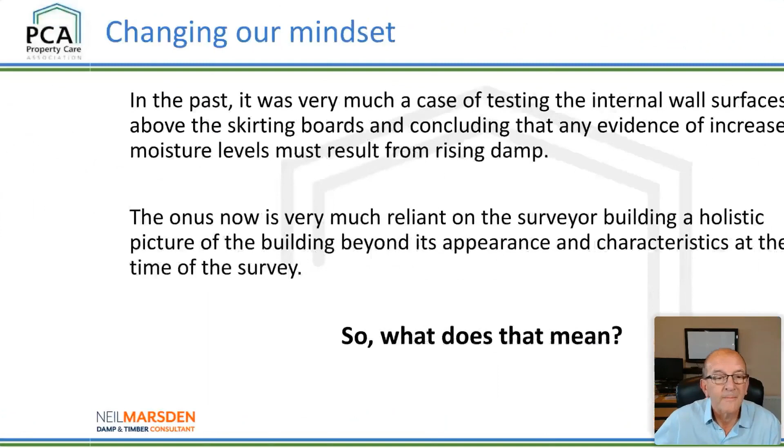So we've got to change our mindset. It's very much a case of, in the past — and I think anybody who's been in the business as long as I have, or for a considerable period of time, will pretty much agree with me — and to some extent it's still out there, not among the better companies, but there are companies out there that...

...get their hands on the mystical moisture meter. Somebody thinks they may have a damp problem, or maybe it's a pre-purchase situation. They go out with the damp meter, skirt around the base of the walls above the skirting boards, and see any evidence of red lights, flashing, or bells ringing on the moisture meter. And the conclusion is then that you must have rising damp. This is typical, I see it again and again.

I'm fortunate because I see a lot of survey reports. The majority of my work is pre-purchase, so somebody's buying a property and they've had a survey carried out. Then in the survey it states: evidence of elevated moisture levels were recorded up to a height of 400 millimeters on the front main elevation, which strongly indicates that the wall is suffering from rising damp. We now recommend you seek further investigation by a damp specialist.

Rising damp always seems to get a mention, but I'm sure it's well established. Does it exist? Of course it does. Is it as common as we believe? Probably not. So we've got to be careful.

There's lots of things that will contribute to damp in buildings, and it's up to us as professionals to sift through that and reach an educated, informed conclusion from which we can then advise the clients on how they proceed. So the onus is now very much reliant on this guidance out there, which says that we should be carrying out the survey in a holistic manner.

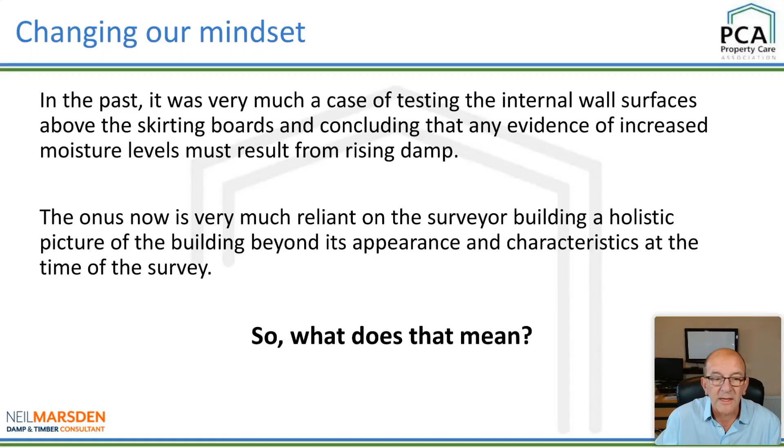Before we even do the survey, we need to establish some factors or details about the property. The age of the property is important because there are different methods of construction — things were added to the construction regulations as properties were built. So it's very important we understand the age of the property, to get a feel for what type of construction we're looking at, and potentially what we can't see, what may be under there.

The type of construction materials and techniques — is it bricks, stone, solid walls, cavity walls? They play a huge part in what we're looking at. It's also about how the building sits in its environment. Is it an exposed location?

What is the orientation? If we're looking at mold problems on a wall, we check it on our compass. A lot of the time, especially where I am, it's going to be the north and east facing elevations. I always teach this from the very beginning whenever I'm working with anybody — I say the one thing you need is to understand orientation. Where does the sun come up in the morning? It comes up in the east.

By midday it's in the south. And then obviously it sets — when we're sitting on that cliff edge with our loved one, with a bit of Barry Manilow on, having a little bit of sway, we're looking west.

Now, that might seem very simple. Again, I was with a group earlier in the week, and I asked a question about orientation, and they really didn't understand it. But once you establish it, we're trying to use all diagnostic information possible to allow us to carry out accurate diagnosis. Orientation is certainly one of the things which is beneficial.

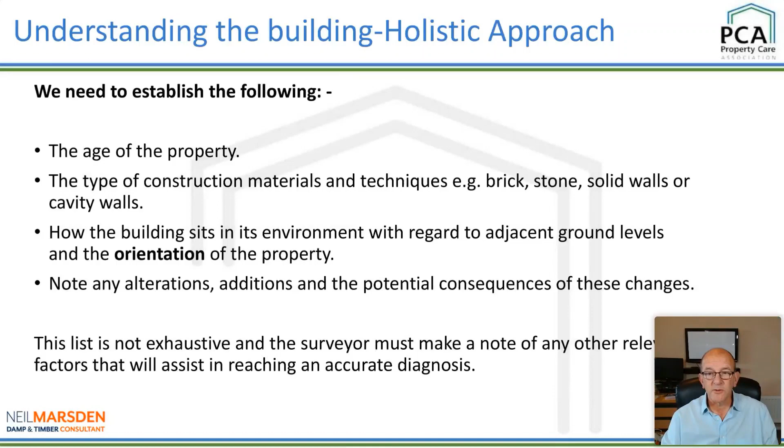So diagnostic tools, what do we use? I would assume that most surveyors or most people who deal in damp investigations on a regular basis will have a range of diagnostic tools. The electronic moisture meter is something which creates great debate. I'm always amazed when I see the social media platforms and you mention the damp meter, and some people feel faint, and you've got to scrape them off the floor - how dare anybody own a damp meter? I realistically think it very much depends on the field that you work in.

I can understand that - well, I've taken myself as an example. A lot of my work is pre-purchase, so I do a pre-purchase survey. The restrictions imposed on that pre-purchase survey are the fact that it's going to be non-invasive. It's normally established before you get to the property. So I turn up, and I can't demand that I remove plaster samples, scrape bits of wallpaper off for diagnostics, and whatever it is that I think is necessary to get a 100% accurate diagnosis. So at the end of the day, to some degree we're going to have to utilize what we've got and make the best of it.

So I never decry anybody for using an electronic moisture meter. But ultimately, I think if you're going to use a meter on a regular basis, or use it in damp diagnostics, you need to use it effectively and understand how it works. A lot of people don't really understand how the electronic moisture meter works, and that is the big downfall. They start putting figures on diagnostics which are not relevant.

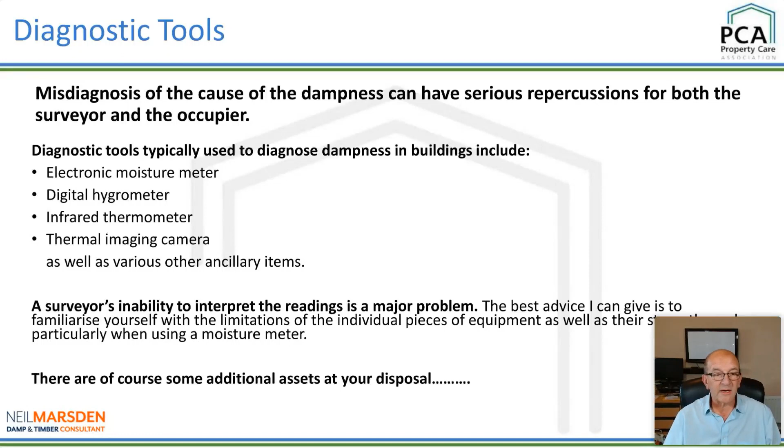So we have our basic toolkit, and obviously we'll have other ancillary items in our toolkit. So what else do we have available to us? We have two of the best bits of kit we could possibly have, and they came free of charge - the items I'm referring to, your greatest assets while carrying out a survey, are your eyes and your mind.

Too much reliance on your technology and a lack of thought can have serious repercussions, both financially and emotionally. Why do I say emotionally? Because I've been involved in cases where people have been accused of giving inaccurate diagnosis or inaccurate advice, and normally there's a price to pay financially.

That is a small part of it. I always think the bigger damage - we can accept it if there's a financial penalty, somehow we get past that - but it's the emotional damage you'll suffer having to defend that case and get through the whole process. So at all costs, you try to avoid it.

But we were given a pair of eyes and a brain, and your eyes and your brain are phenomenal tools - look at what mankind has achieved with them. So when we use our diagnostic tools, I had a very interesting one - a surveyor came up and spent a day with me a few weeks ago.

It was just under a day because he had to get away early. He turned up with his damp meter, fine, lovely guy, we got on really well. He came up for a few hours and we went out on a survey together.

He put his meter on the wall, and the red lights were flashing, hitting maximum. He said, 'Oh, the wall's damp.' I said, 'Seriously, do you think so?' He said, 'Yeah, we can see the meter, it's really damp.' I asked what he'd recommend. He said, 'I suspect it's rising damp.' I asked why, and he said, 'It's just the way the meter is reading, it's telling me this.'

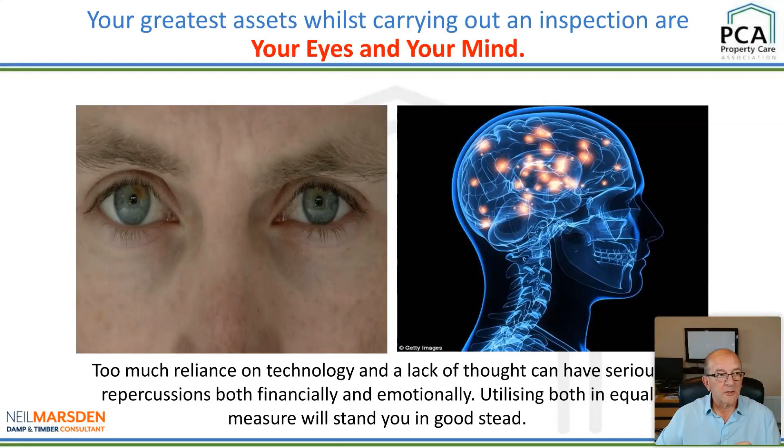So I thought I'd walk you through a short case study, a property I looked at probably about four weeks ago. We often talk about following the trail: rather than just relying on the equipment, we try to gather as much information as possible from the environment we're in, and then follow what's happening. We talk about it, but how do we actually do it? This case is an example of where it can be very beneficial.

Obviously they were concerned, they'd seen the news and heard all about this dreaded mold that's going around. So the daughter decided they needed to bring somebody in to give some advice. They looked up the local search and identified a damp specialist who they believed was probably a good fit for them.

So they invite the damp specialist to come to the property. The damp specialist came out and said, when you see mold like that, it's very typical of condensation. The summary was, it's very typical in properties of this age and type of construction.

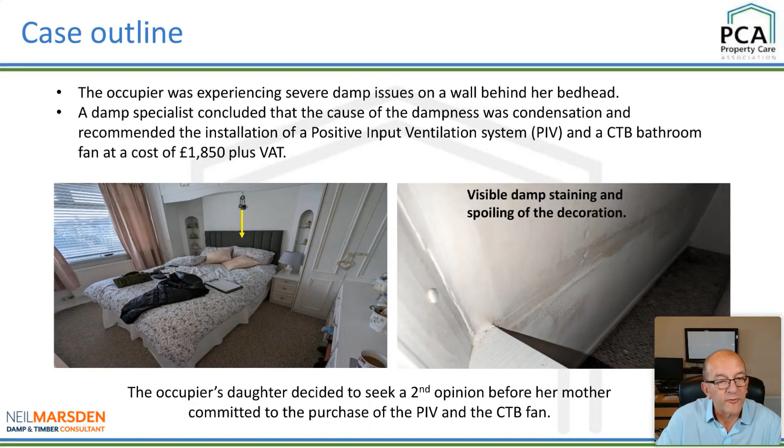So I got there, had a big chat with him. How long have you lived in the property? I've been here a lot of years. Have you ever had a problem before? No. It's condensation - have you had condensation? Do you see it on the windows? I always think speak with the client or the property occupier, they will give you a mine of information which is going to allow you to build a picture.

So it was obvious that condensation was an issue. The mold and mildew on the back of the bed head and everything else pretty much pointed in that direction. So I said, are you happy for me just to potter on and wander around the property and really get a feel for what's going on? Yeah, absolutely. So anyway, they left me to it.

The one thing which, on the photograph, looks fairly obvious, but when you walk into the room, it wasn't something that jumped out at you - I've zoomed in there so it magnifies it. But I noticed that the Contiboard at the base of the built-in wardrobe was slightly swollen, as you can see. Straight away that raises a little bit of a red flag. Why? Sometimes they do split and it might have been an installation fault or whatever.

So what I decided to do then - the bed was pulled partially out - I got a damp meter and decided to scan the carpet in that area. Sounds a bit bizarre, but by doing so it actually indicated to me that there was a significant moisture content in the carpet. As a result of that, I'd already asked them, can I roll back the carpet, are you okay with that? I'm a decent carpet fitter, I've been doing it for the best part of 40 years, and they were happy for me to do so. They wanted to get to the bottom of the problem.

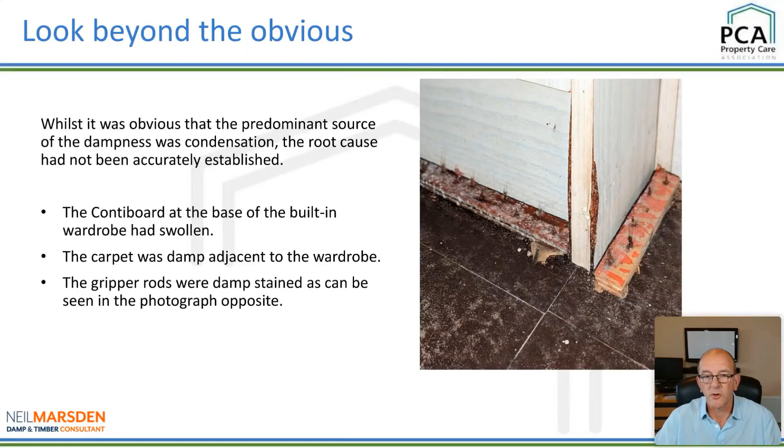The solid floor is overlaid with thermoplastic tiles, but there you are - I put the moisture meter, managed to insert it between the tiles, and at the location adjacent to that swollen Contiboard, I'm getting readings of around 28-30% moisture content. It's obviously more than I would have expected. And then 1.5 meters back from the gable elevation, which has got the condensation behind the bed head, I'm getting readings of around 11%.

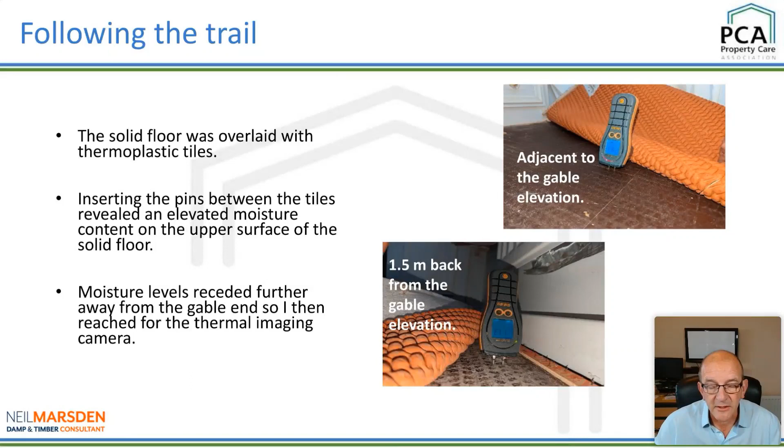There was a significant tail off as I moved away from that built-in wardrobe. That raises concerns, or points to the problem being somewhere in the region of that built-in wardrobe. So I decided to get the thermal imaging camera out.

While I was doing that, the relative humidity within the bedroom was just under 70%. Now, that's a snapshot, a moment in time. It doesn't really tell me anything substantial or significant.

But I did go into the other rooms. I placed the hygrometer into the different rooms adjacent to that area, and the average relative humidity in the other rooms within the property was 56%. So it tells me that there's something in particular going on - why is the moisture content, or relative humidity, hitting 70% specifically in that bedroom?

Again, is it on its own? Does it give me anything meaningful? Probably not. But as an additional piece of evidence, it's a benefit - it gives me something I can work with to build up a bigger picture.

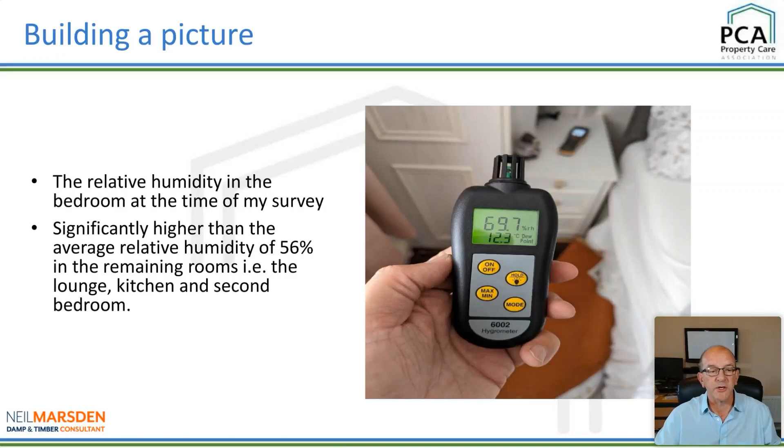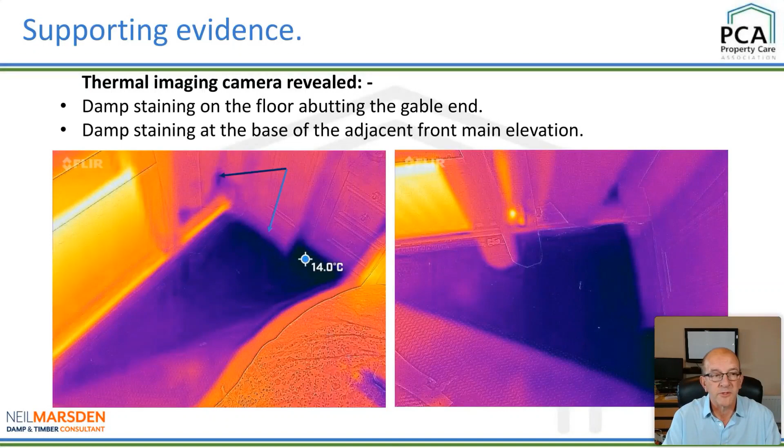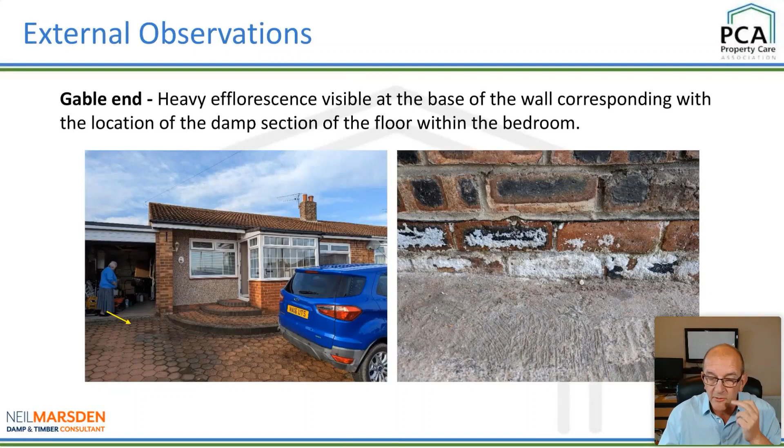Had I not gone outside and seen it, I would never have known about it, but it was very beneficial to see this. It corresponds exactly with the area where I suspect there's an internal plumbing leak.

So considering all of the evidence at the time of this survey, my conclusion was that condensation was the result of an internal plumbing leak. The recommendation was that the client instructs a heating engineer to investigate and locate the source of the plumbing leak.

Now, this is perfectly reasonable. We are surveyors - we go out and do surveys. We are not experts in every aspect of building construction. In the past, we seem to have got into a scenario where we wanted an instant solution, where we wanted to give the client an instant solution. But sometimes we can't do that - it sometimes requires further investigation by a specialist in that field.

So anyway, long story short, the client's daughter called me 6 days after I'd carried out the survey to inform me that a leak was found on a pipe located below the base of the built-in wardrobe. The repair was completed - it was identified, and the heating engineer carried out the repair at a cost of £165, inclusive of VAT.

So following the trail, just by gathering the evidence at the time of the survey and trying to piece it together and build a picture of what is normal in this property and what isn't, following the trail resulted in an accurate diagnosis, and the homeowner saved themselves over £2,000, minus the cost of a bottle of Singleton whiskey that she asked her daughter to send to me as a thank you, because we'd had a chat.

The lady in the property was Scottish. We got on about whiskey, as you would when you're in somebody's property. We did get on from where she came from. We talked about whiskey, and very kindly she remembered, and she sent me a lovely bottle of whiskey to enjoy.

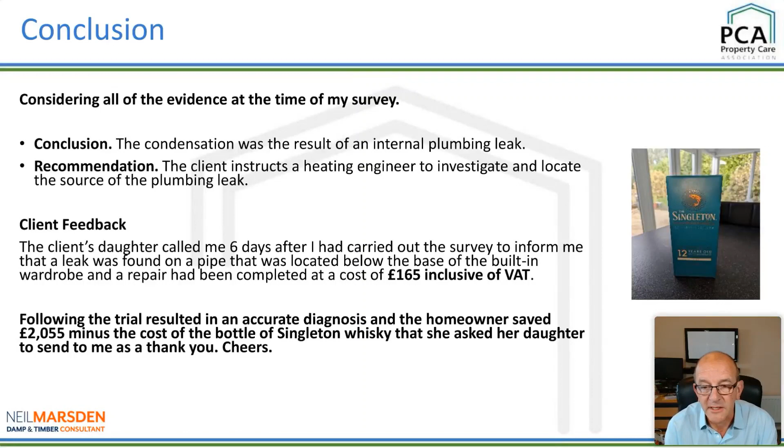But I'm just delighted that she got the right result. It would have been very, very easy to say it's just condensation and install the CTB fans and so on.

So we've seen it before. This, again, is a very quick case study. It's the easiest way to bring it in.

The background of this property: it consists of a block of residential ground floor flats built in 2022. Bear in mind, we're only in 2023 now, so these properties are a year old. Built of cavity blockwork, brickwork, block and beam floor construction, with internal walls dry lined on metal tracking stud framing.

All three of the ground floor flats experienced condensation issues at the base of the wall and the skirting boards, with heavy mold growth visible in isolated areas. The first floor flats were not affected, so it was a problem on the ground floor.

The extractor fans - so it was Adam. Adam is an associate of mine who's based in Colchester. Adam did the survey, and afterwards he told me about it. We talked about it while the process was going on.

Adam turned up, did the survey, and he noted that the extractor fans, the extraction rates were poor, and the undercuts on the door were inadequate. So they were restricting the ventilation and airflow within the flat.

So we see the obvious - we've seen this before. We look at it and we can jump to a conclusion. You need to deal with those undercuts on the doors, and you need to get the extractor fan either serviced or replaced. It would have been very easy to go back to the client and say it's just condensation - we recommend we get the doors undercut, and get the fans serviced or replaced.

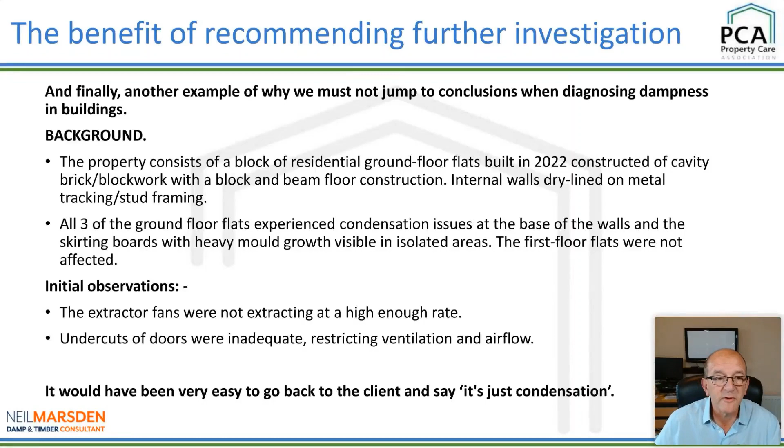There you are - using, so we've tested, Adam's tested the fan, that's his arm, and he's tested the fan. The extraction rates are poor on the mechanical extraction fan. The doors, when they close, are tight to the carpet, so there's no ventilation whatsoever from room to room. So we note these things because it's important when investigating damp that sometimes it may well be that they are purely the cause of the problem.

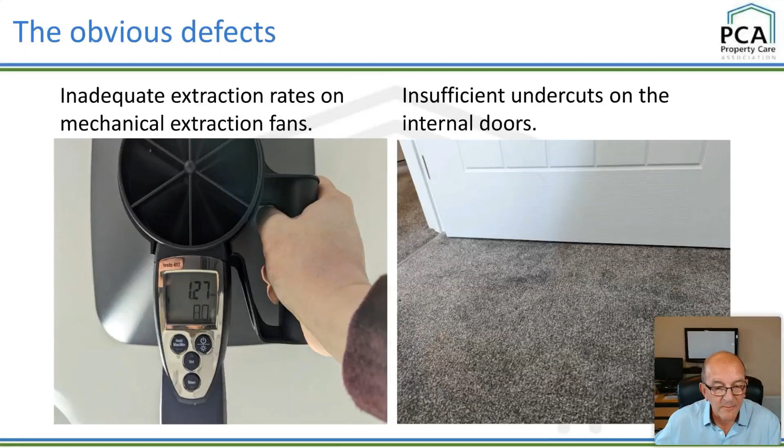But in this instance, Adam suspected there was something else going on. He carried out further investigation using a thermal imaging camera and revealed isolated cold spots in several areas. Because of the cold spots, Adam then decided to carry out an inspection of the cavity using a bore scope, which was perfectly logical.

So we started off with some mold and mildew in the skirting board. We've checked, obviously, the holistic approach - we check all the potential contributing factors in the building, which leads us now to getting our thermal imaging camera out, and you can see these distinct cold spots.

So Adam recommended further investigation. It was outside the scope of his survey, but the initial thoughts were it was probably a problem with cavity wall insulation. So Adam did his bore scope inspection, and lo and behold...

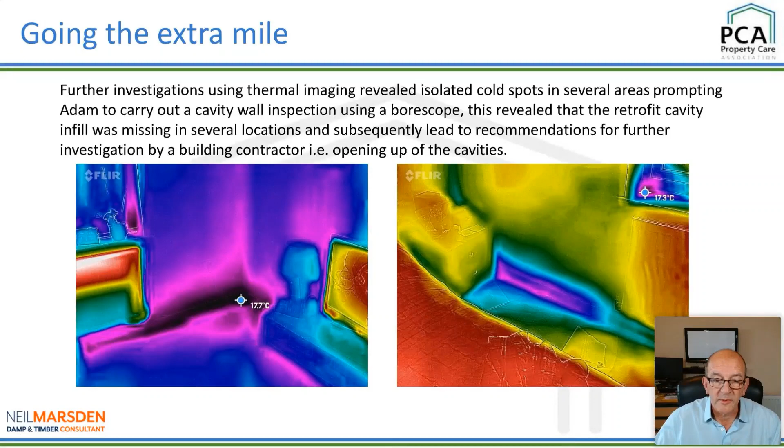That is the condition of the newly installed cavity wall insulation. I'm sure you'll all look at it and straight away agree that it's not brilliant.

So we've got a problem now, and the problem is, Adam can do a bore scope inspection, but we're limited on what we can do. Can we start breaking open walls and all the rest of it? The chances are we probably can't, and we're not equipped to do that.

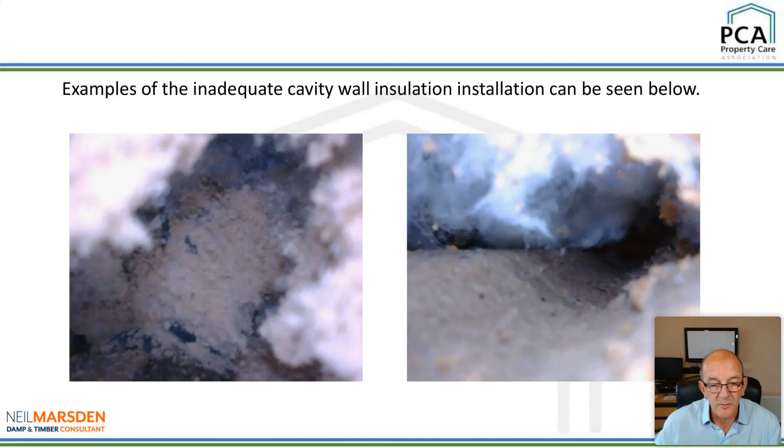But following the investigation, it was fair to recommend further investigation, which Adam did - he went back to the client and said, I believe there's a problem here, and it's almost certainly related to the inadequate cavity wall insulation installation. The client took it on board, and they had contractors go back.

Following further investigation, it was confirmed that the insulation had been poorly installed, resulting in reduced surface temperatures, which made them very vulnerable to condensation - and indeed, condensation was occurring in those locations.

The outcome was the cavity wall insulation installers agreed to revisit the property and make good the cavity wall insulation. We've seen this lots of times where the cavity wall installers go back and actually put right what they should have done right in the first place. But the benefit is the client has now got a solution - they've got an answer to the problem.

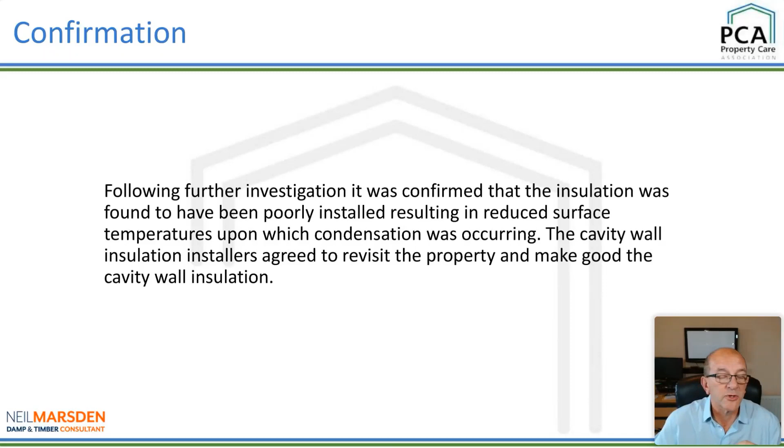We could have just recommended replacing the fan, or recommended undercutting the doors. It would not have dealt with the root cause of the problem. And that is why, when we're on site, we spend a few extra minutes just building a picture and trying to get on top of what's causing it - not what we can see, but what the cause is.

So to summarize it, our role as professional surveyors brings with it responsibilities. We have a duty of care to carry out a survey in a thorough, conscientious and professional manner as befits an average surveyor. That is the acid test.

In September 2022, a document was released. This was released while the big launch was at Warwick University - I'm sure some of you will have been there for it. But the document was released. It's a document which was two years in the making. There was a lot of negotiations went on behind the scenes, a lot of discussions. You could imagine when you get people into a room from different professions and different organizations. In September 2022, this document was finally produced.

And it provides guidance on best practices when investigating moisture and its effects on traditional buildings. It's referred to as the joint position statement. It sets out the framework that we as surveyors are expected to adopt. Now, I would advise anybody who works as a surveyor to get a copy of this. It's relatively easy to get a hold of. I'm sure we can do it via the PCA, or if you're RICS, I'm sure you've already had a copy emailed to you or sent to you. But I would familiarize yourself with that document because it gives some very, very good guidance.

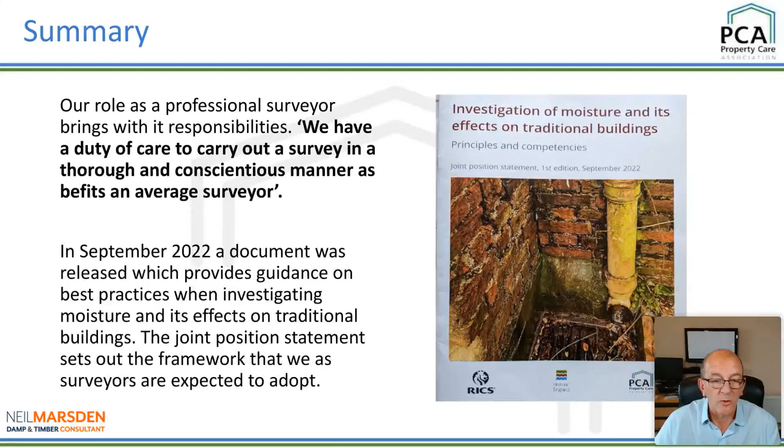I'm long in the tooth, I'm old. I've seen lots of documents produced, and sometimes I'm a bit puzzled by them and what the thought behind them is. But this is actually a really well thought out document, and it gives us a protocol now when investigating damp issues. One of the things that it does talk about - it sets out clearly the protocol for investigating damp, but we provide a holistic diagnosis that identifies and deals with the causes rather than focusing on the symptoms.

I think one of the problems we've had, or we've done for many, many years, is that we see the problem and we want to then deal with it. We want a solution. Sometimes we're not going to get that in one visit. We turn up to do a survey, and we aren't magicians. We don't have mystical powers.

Sometimes I've gone back to properties two to three times because it's really difficult to pinpoint that. Sometimes it's difficult to pinpoint it, but we explain that to the client. We don't feel pressured into just coming up with an instant solution - this is what you need to do. We understand that dealing with dampness is often a staged process. Recognize how to deal with the obvious first, and there's no shame in that.

If I can work out what the predominant source of damp is - I see this typically when we have penetrating damp, rainwater penetrating the building fabric. So we've got a penetrating damp issue, and I've pointed out, I believe that this is a penetrating damp issue. The external render needs to be made watertight, or the gable needs repointed or whatever. I'll recommend what I think is appropriate. And I will put a caveat in there and say, obviously that is the predominant source of damp as it stands at the time of my visit - rainwater penetration. It is feasible that it is masking an underlying damp issue.

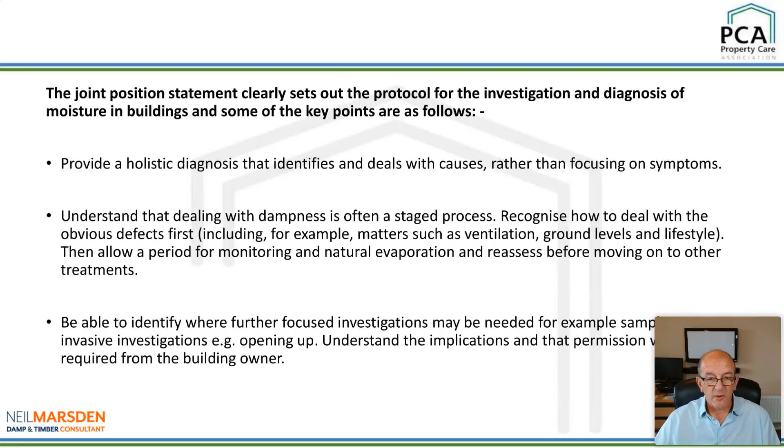This is one of the documents that will be used in the future. It's very user friendly, not a hugely difficult document to read, relatively short. Congratulations, and I applaud the people who put this together, because it's a really informative, useful document, not just for surveyors starting out in their career, but for people who've been doing this a long time. I found it incredibly useful, so I'd recommend you have a look at it, obtain a copy, and familiarize yourself with it. It gives you guidance that should ultimately be beneficial.

So there you are, ladies and gentlemen. I'm very conscious of the time. I think we're pretty much hitting it at the right time, so I hope it makes sense. I've summarized there.

I'm passionate about it because I'm not one of those who goes out and bashes surveyors or condemns surveyors. I say to any group, and there are people here I've worked with, some very recently, and I've said it when I've stood in front of groups of whoever I'm training, surveyors or whatever: I am no cleverer than anybody else, no cleverer than anybody else in attendance today. I'm a bit older than some of you, and I've had a little more experience.

But I often think with damp diagnostics, there's no hard and fast way we do it. We're human beings, everybody sees things differently. You will look at something and see it differently to the way I will see it. But ultimately, my experience is we'll work through the process and normally come up with the same solution or diagnose the same problem. So because you did it differently to me doesn't make you any better or worse, it just means we see things differently, which is very, very healthy.